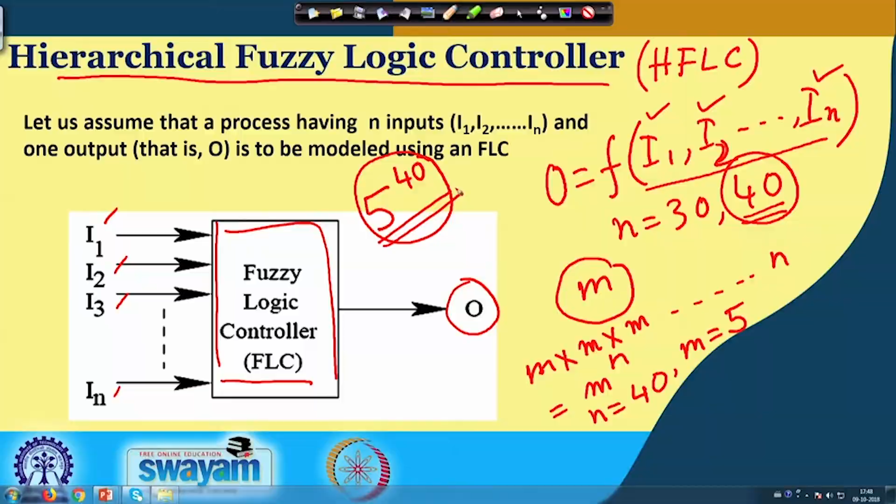Now let me summarize whatever I have discussed. Supposing I am going to handle a real world problem having a large number of input variables, and if I use 4 or 5 linguistic terms to represent each of the input variables, we need a very large number of rules, and as the number of rules increases, the computational complexity of this fuzzy logic controller is going to increase. So this is not desirable, and this particular problem is actually known as the curse of dimensionality.

Now if you see the literature, people are using this particular term, curse of dimensionality. So the fuzzy reasoning tool or fuzzy logic controller is suffering from this particular drawback, and that is nothing but the curse of dimensionality.

Now, how to solve this particular problem? To solve it, the concept of HFLC, that is hierarchical fuzzy logic controller, comes into the picture. Let us try to understand the working principle of this HFLC.

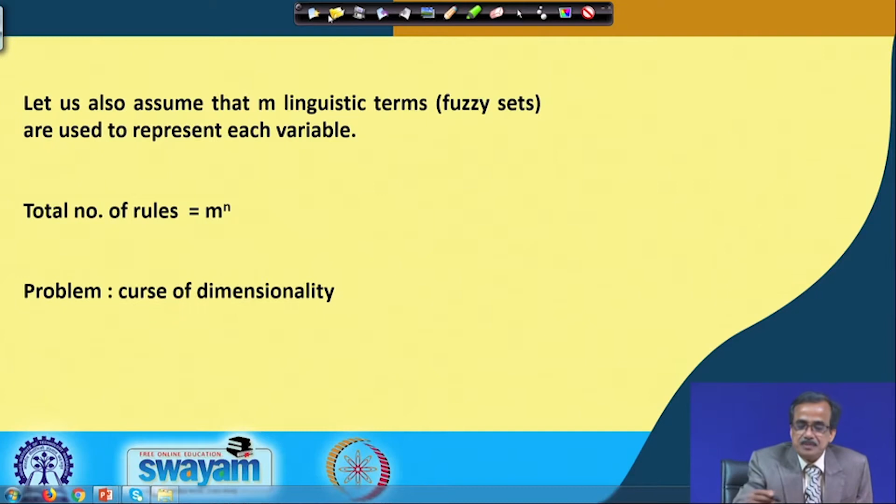Now, to replace that, I am going to use the concept of HFLC, or hierarchical fuzzy reasoning tool or fuzzy logic controller. Structure-wise it is very simple. Out of the n input variables, we try to find out which are the most important ones.

Supposing, hypothetically, I1 is very important, meaning I1 has significant contribution towards the output. Similarly, I2 is another very important input variable. So we take I1 and I2, these two input variables, for the first fuzzy logic system.

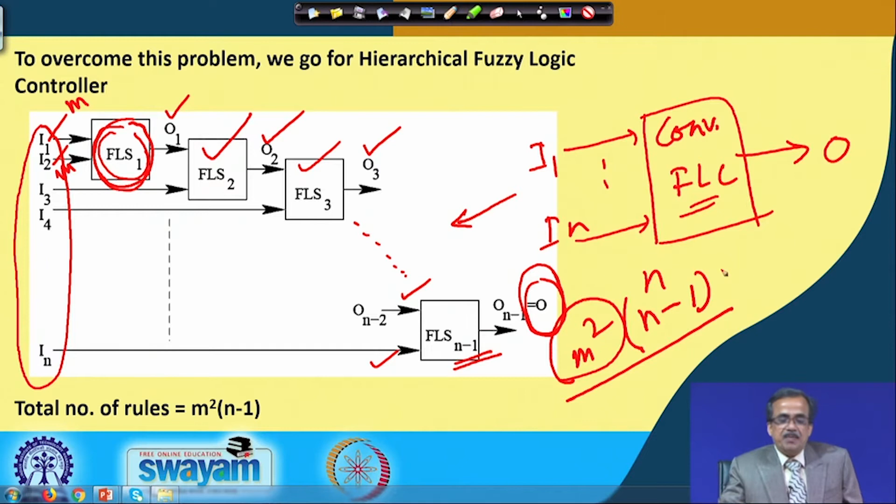Now see the advantage of this HFLC. Previously, in the conventional fuzzy logic system, the total number of rules was m raised to the power n. In place of that, in the HFLC, we have only m square multiplied by n minus 1.

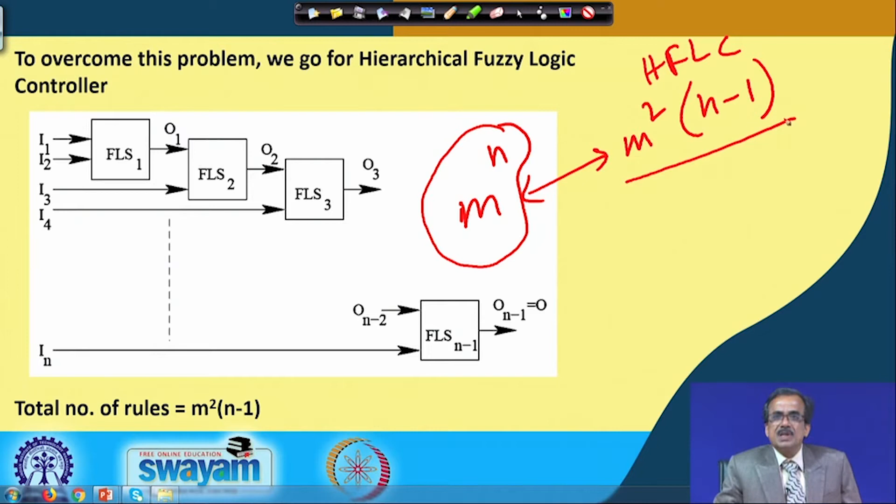Let me take a simple example with numerical values to understand this. If I put m equals 4, and consider n equals 10, then in the conventional FLC we had the maximum number of rules as 4 raised to the power 10, which is a very high number, and in place of that...

So here I am getting m square, that is nothing but 16 multiplied by n minus 1, that is nothing but 9, and this equals 144. So in place of 4 raised to the power 10, I am actually using only 144 rules.

So this is actually the advantage of using HFLC, that is the hierarchical fuzzy logic controller. Now to conclude, for a problem having a large number of input variables, we generally go for the hierarchical fuzzy logic controller. Now this is the merit, the advantage of using HFLC, but it has got one demerit also.

That particular demerit is as follows: we may not get the actual level of accuracy which we get in the conventional FLC. So we will be getting less accuracy in HFLC in comparison with conventional FLC, but computationally it is faster, HFLC is faster compared to conventional FLC. So these are the relative merits and demerits of conventional FLC and HFLC.

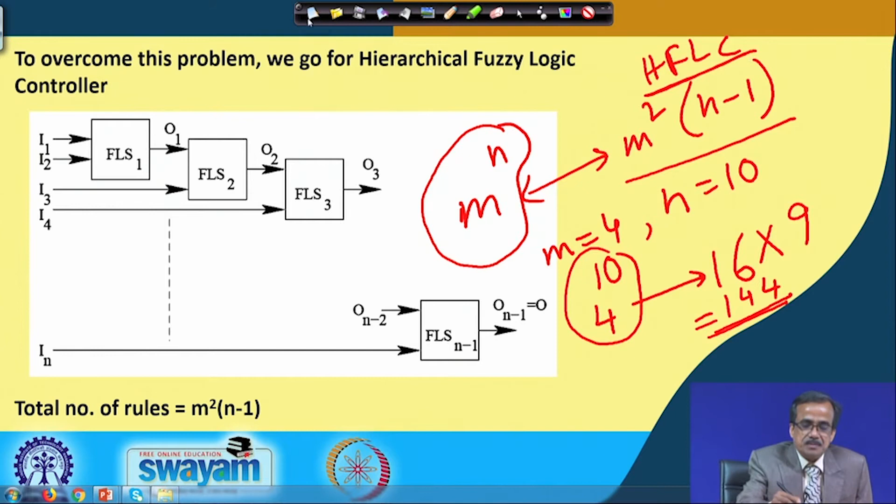Now we are going to concentrate on another thing, that is called the sensitivity analysis of a fuzzy reasoning tool or fuzzy logic controller. Let us try to understand the meaning of the term sensitivity. By sensitivity, what we mean is the change of output to the change in input.

So sensitivity S is nothing but the change in output to the change in input. That means, for unit change of input, what should be the amount of change in output, that is the sensitivity. Supposing I have got one FLC used to model a process having two inputs I1 and I2, and I have got only one output. Now my aim should be how to find out the rate of change of output with respect to I1, and the rate of change of output with respect to I2.

That means, if I make unit change in I1, what will happen to the change in output, and if I make unit change in I2, what will happen to the change in output. So those things we are going to find out. Now how to determine this, the change in output to change in input? So what we do is, we vary the input variables by different amounts.

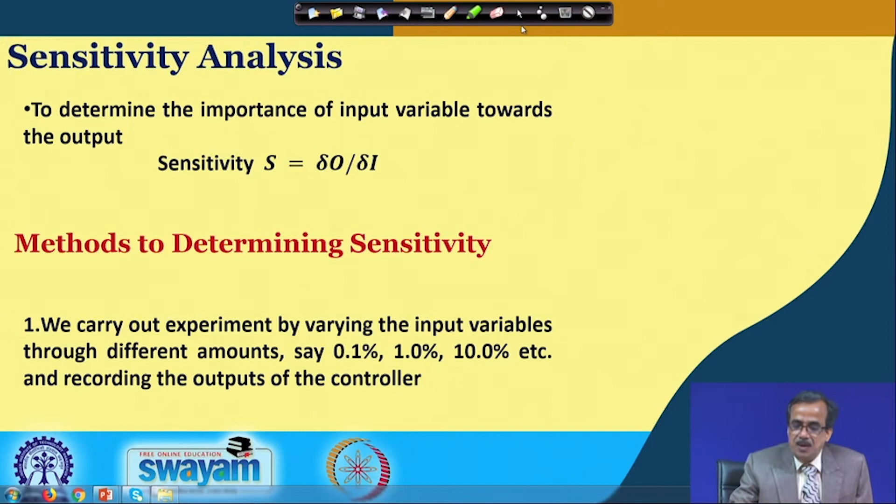Now mathematically also we can find out this particular sensitivity. Let me concentrate on a fuzzy logic controller which is going to determine the output for two inputs, I1 and I2. So output is a function of the two input parameters I1 and I2.

Now what we do is we just change the input I1 by a small amount, say delta I1. So we try to find out the change in output, that is delta O, and that is f of (I1 plus delta I1, I2) minus f of (I1, I2), and this is nothing but the change in output, delta O.

And that is equal to the partial derivative of f with respect to I1, multiplied by the change in I1, that is delta I1. So this is the way we can find out the change in output using the mean value theorem. So using the mean value theorem we can write this down and find it out. Now supposing that this partial derivative of f with respect to I1, its mod value is coming to be greater than 1.

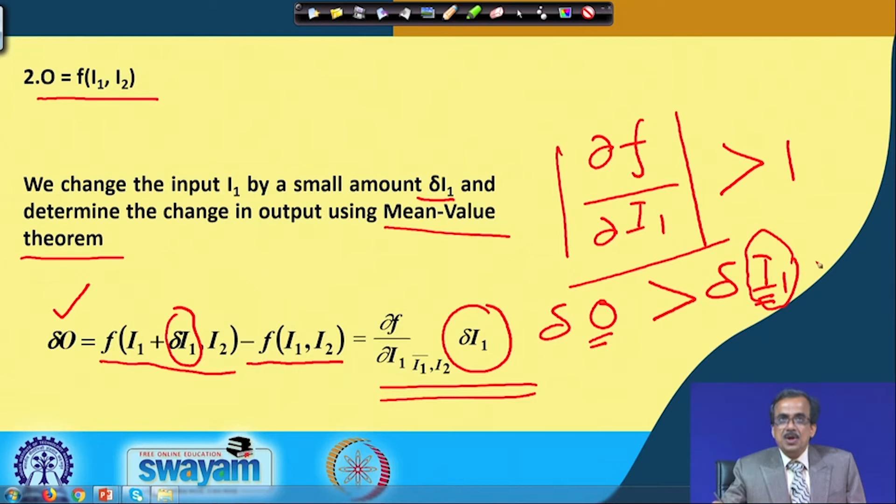Now, in place of I1, I can also carry out the sensitivity analysis for I2, and following the same principle, I can find out what should be the change in output corresponding to a unit change in the input I2. So sensitivity analysis can be carried out for both I1 and I2 separately by following the same procedure already discussed.

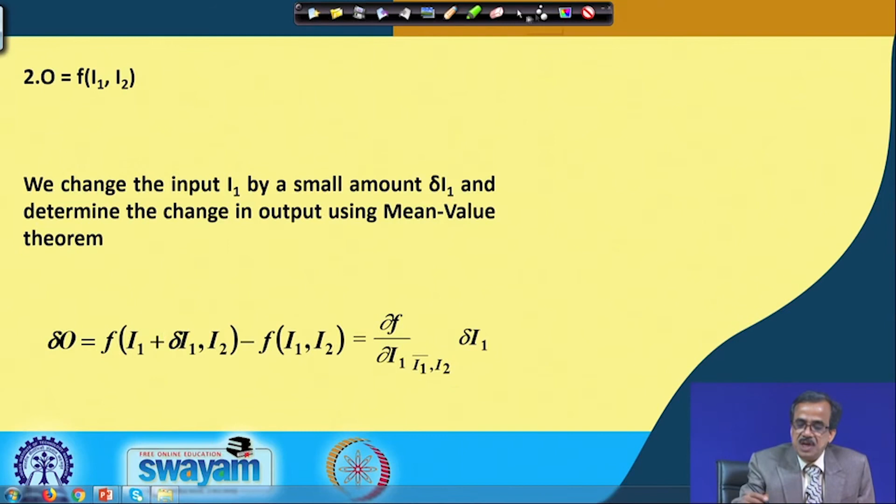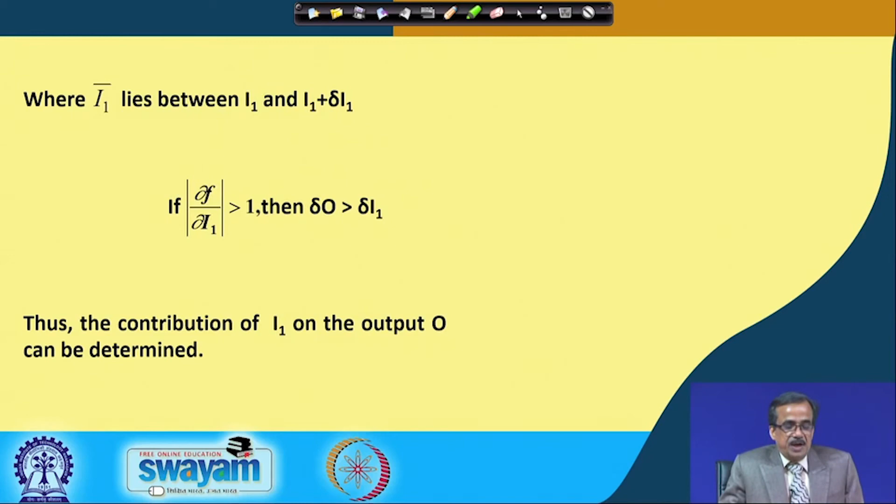Now, this is what we mean by the sensitivity analysis of the fuzzy reasoning tool, and we can find out the contribution of the different input parameters or variables towards the output. Now I am going to discuss the merits and demerits of this fuzzy reasoning tool or fuzzy logic controller.

The first point I am going to make here is that the fuzzy reasoning tool is a potential tool for dealing with imprecision and uncertainty. This I have already discussed several times.

The second merit or advantage of FLC is that it does not require an extensive mathematical formulation. That means, if you want to find out the input-output relationship, we need not go for the differential equation and its solution. If the designer has some information about the process to be controlled or modeled, he or she can design the rule base and the database, which is nothing but the knowledge base of the fuzzy logic controller.

Once that particular knowledge base has been determined, if we send one set of input parameters, there is a possibility that you will get the output. So it does not require extensive mathematical formulation of the problem.

Now I am going to concentrate on the demerits. To discuss the demerits, we try to say that the performance depends on the knowledge base, and how to determine this particular optimal knowledge base - that means how to determine the database, how to determine the optimal rule base - is a difficult task.

The fuzzy reasoning tool in fact does not know anything, it does not have any inbuilt optimization tool. So what you will have to do is optimize or train this fuzzy reasoning tool with the help of an optimizer and known input-output data. That means we will have to design and develop the knowledge base of this fuzzy logic controller or fuzzy reasoning tool.

As I told you, determining the proper knowledge base is not an easy task, and we will be discussing how to design and develop the optimal knowledge base of a fuzzy reasoning tool or fuzzy logic controller, so that it can perform in the optimal sense.

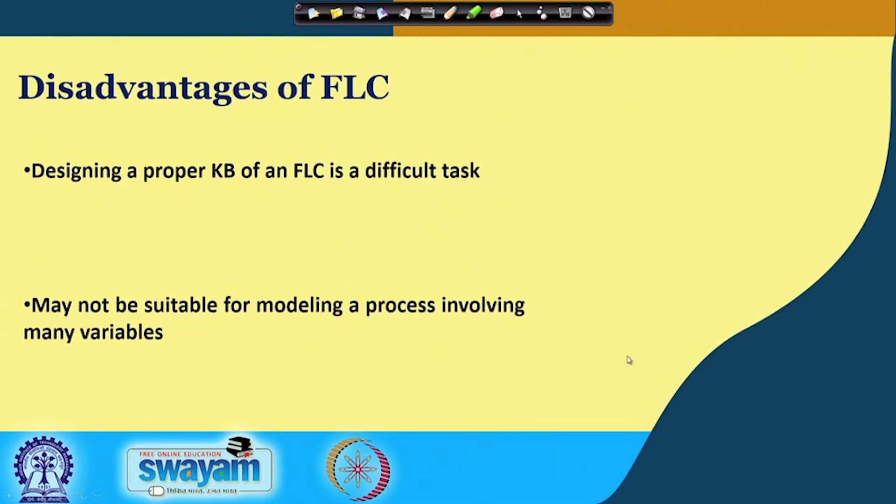Now, the next point: it may not be suitable for modeling a process involving many variables. This problem we have already discussed - if there are a large number of variables, like the problem of weather forecasting, it is a very difficult real world problem. For such a problem there will be a very large number of input parameters or variables, and consequently the number of rules is going to increase drastically, and the computational complexity is going to be very heavy.

That is why, for a problem having a large number of input parameters or variables, our recommendation should be that we should not go for this type of fuzzy reasoning tool or fuzzy logic controller. To solve or tackle this type of real world problem, we have got another very powerful tool, that is artificial neural networks. Those tools and techniques we will be discussing in detail after some time. Thank you.